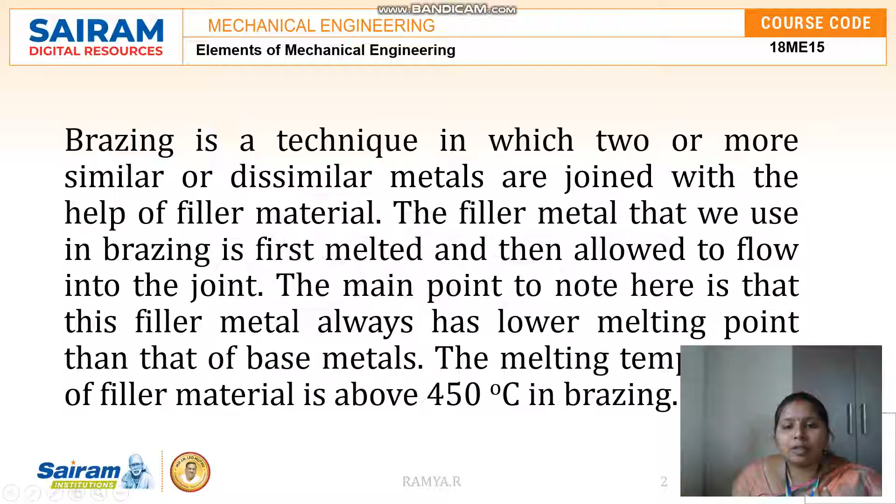The main point to be noted here is that the filler metal always has a lower melting point than the base metal. The melting temperature of the filler metal is above 450 degrees Celsius in brazing. In soldering, the melting temperature is less than 450, but here it is more than 450 degrees Celsius.

So why do we need brazing? Why should we choose it? We choose brazing based on some of its key features. It is the most cost efficient process. Component distortion is almost eliminated, or we can say reduced. It is the most compatible method for joining dissimilar metals with a strong joint.

No need of much skilled labor. Thin and thick surfaces, for example plates, can be easily joined. More complicated joints that cannot be joined with the welding process can be easily joined with brazing.

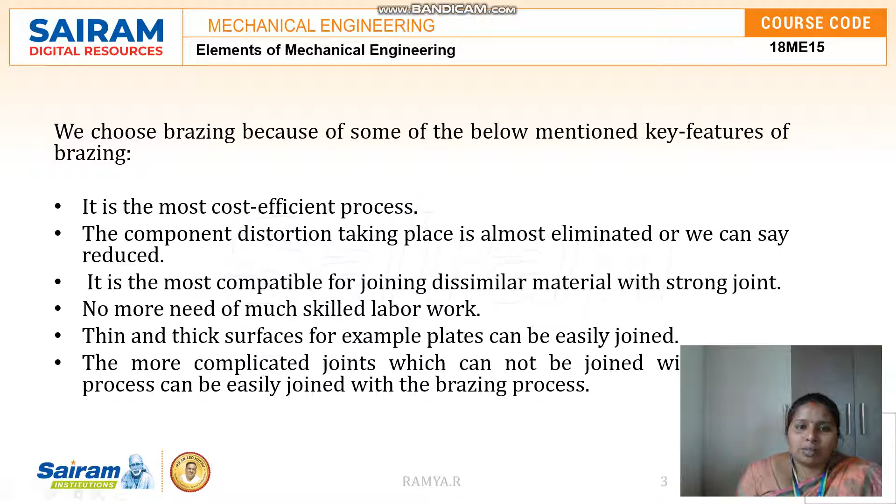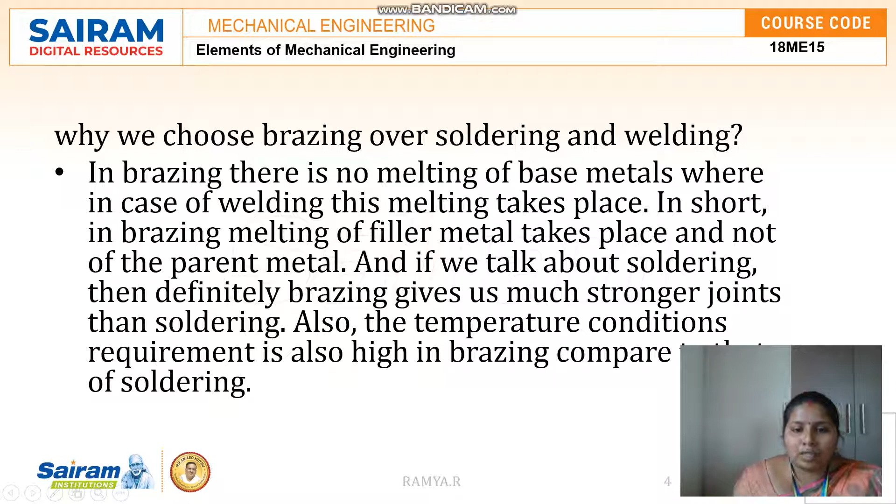Why should we choose brazing over soldering and welding? In brazing there is no melting of base metal, whereas in welding this melting takes place. In short, in brazing melting of the filler material takes place and not of the parent metal. Compared to soldering, brazing gives much stronger joints. Also the temperature requirement is higher in brazing compared to soldering.

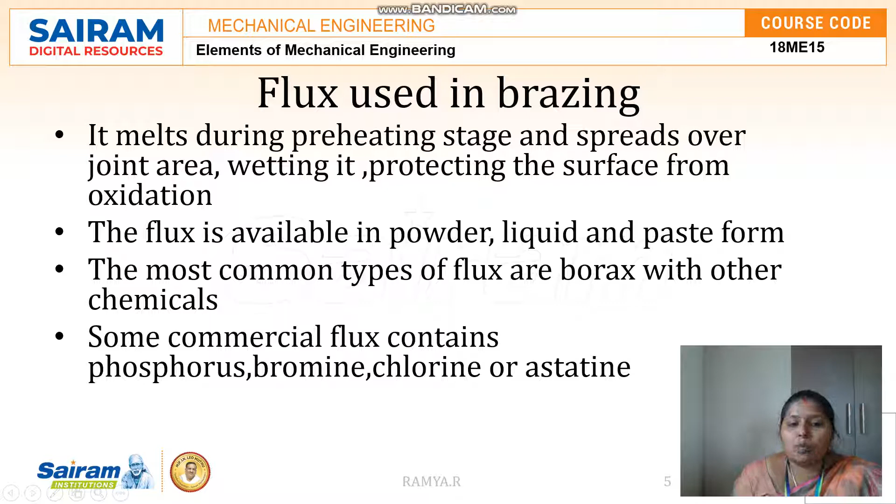The next one is about the flux used in brazing. It melts during the preheating stage and spreads over the joint area, wetting it and protecting the surface from oxidation. Flux is available in powder, liquid and paste form. The most common type of flux used is borax with chemicals. Some commercial fluxes contain phosphorus, bromine, chlorine and astatine. These are some of the fluxes used in brazing.

If there is a process, there should be precautions for it. As brazing is one of the efficient metal joining processes, you must take the following precautions in order to complete brazing smoothly. Use flux in the proper amount to prevent oxidation.

Do not overheat, and provide proper temperature with an appropriate atmosphere. Wear proper gloves and goggles, and avoid direct contact with the workpiece. Keep good ventilation and do brazing in a sufficient place rather than small or unfavorable places.

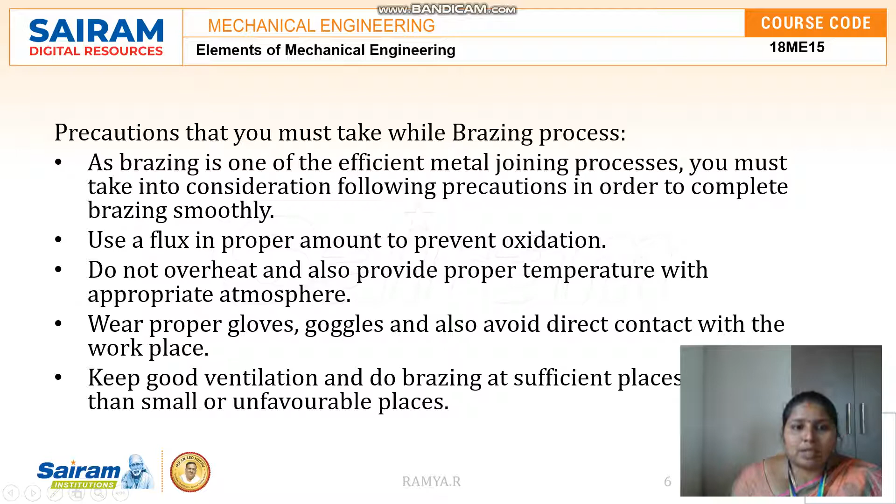Next are the advantages over other metal joining techniques such as welding. Brazing is used to bond a variety of metals, dissimilar metals and even non-metals, that is metallized ceramics. Component tolerances are maintained more accurately than welding. Brazing does not melt the base metal, so it allows much stricter control on tolerances. It produces a clean, corrosion resistant joint.

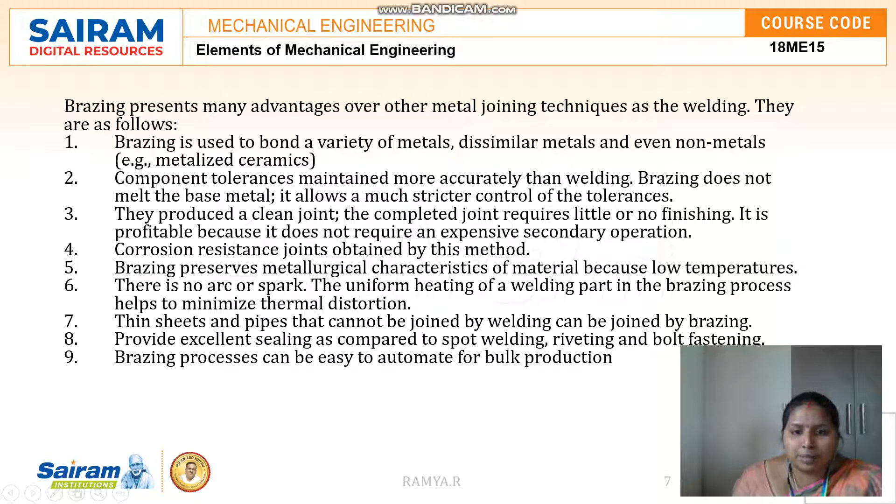Brazing preserves the metallurgical characteristics of the material because of the low temperature. There is no arc or spark produced, and thin sheets can be easily joined by brazing, which cannot be done by welding. It provides excellent sealing compared to spot welding, riveting and bolt fastening. The brazing process can be easily automated for bulk production. These are the advantages over other techniques like welding.

There are different types of brazing available according to the situation. The first one is torch brazing. This is the most common type of brazing technique and one of the most commonly used brazing processes.

Basically, it is done in air or open environment. The torches used are oxy-fuel gas torches. Torch brazing is further classified as manual, automated, and machine torch brazing. Propane or acetylene are the two fuels that are used in torch brazing.

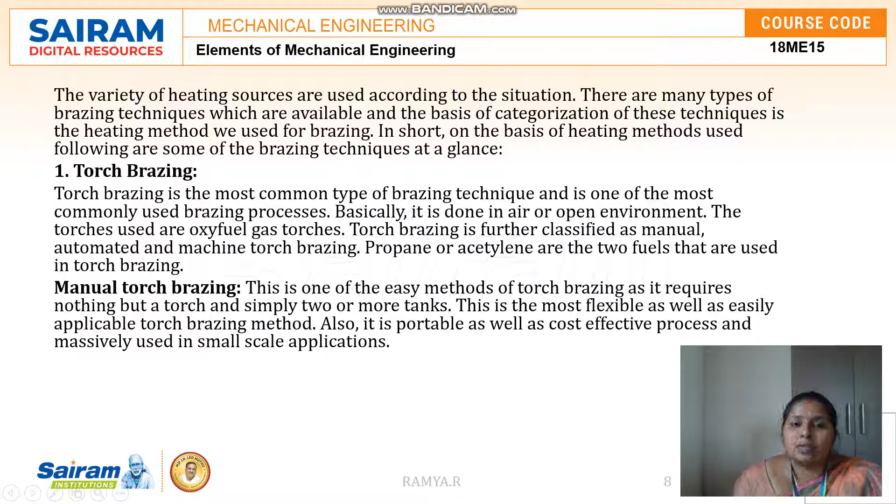The next one is manual torch brazing. This is one of the easiest methods of torch brazing, as it requires nothing but a torch and simply two or more tanks. This is the most flexible as well as easily applicable torch brazing method. Also, it is a portable as well as cost effective process and massively used in small scale industries. So this is torch brazing. So this is how the torch brazing is done.

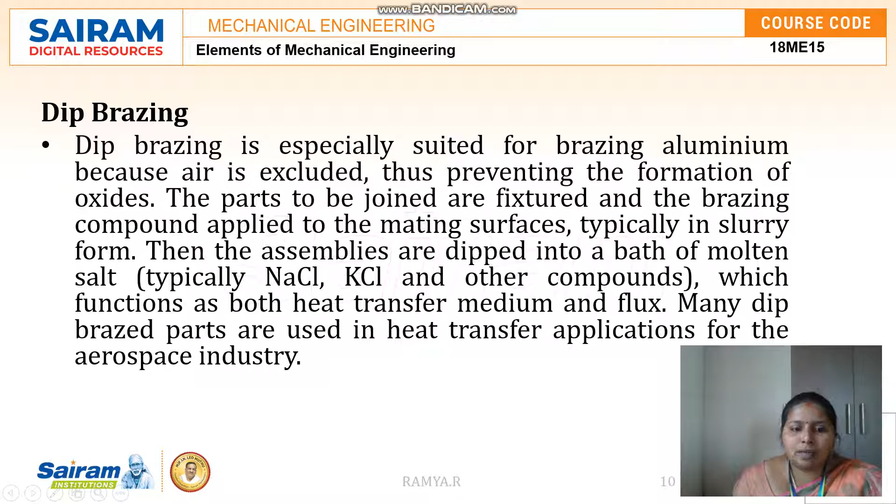And the next one is dip brazing. This is suitable especially for brazing aluminium because air is excluded, thus it prevents the formation of oxides. The parts to be joined are fixtured and brazing compound is applied to the mating surfaces, typically in a slurry form. The assemblies are dipped into a bath of molten salt, which functions as both heat transfer medium and a flux. Many dip brazed parts are used in heat transfer applications for the aerospace industry.

So this is how the dip brazing is done. You can see the slurry in which the component is dipped and it is taken out. So this is commonly used for producing parts for aerospace industries.

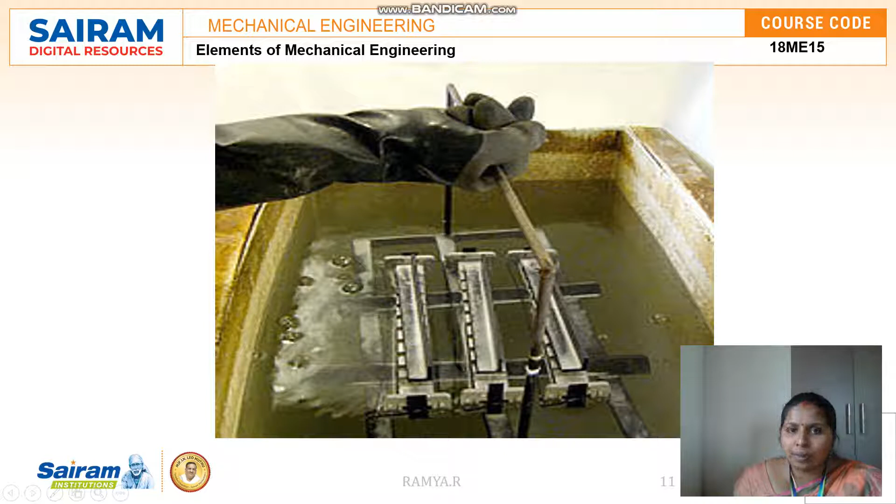And the next one is induction brazing. In induction brazing, the metal parts to be joined are placed inside an induction coil and a very high frequency electrical current is passed through. As current gets induced on the surface of these metal parts, the resistance of the metal part opposes the inducing current. As a result, heat is developed and consequently the metal parts get heated.

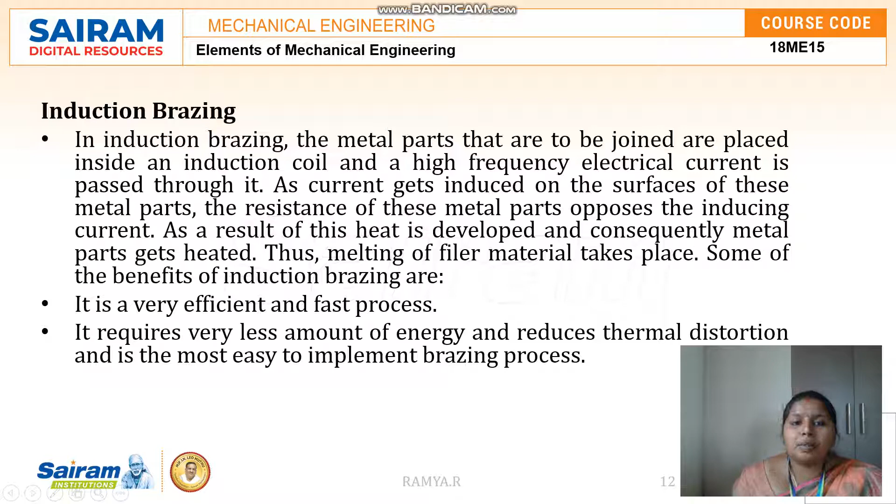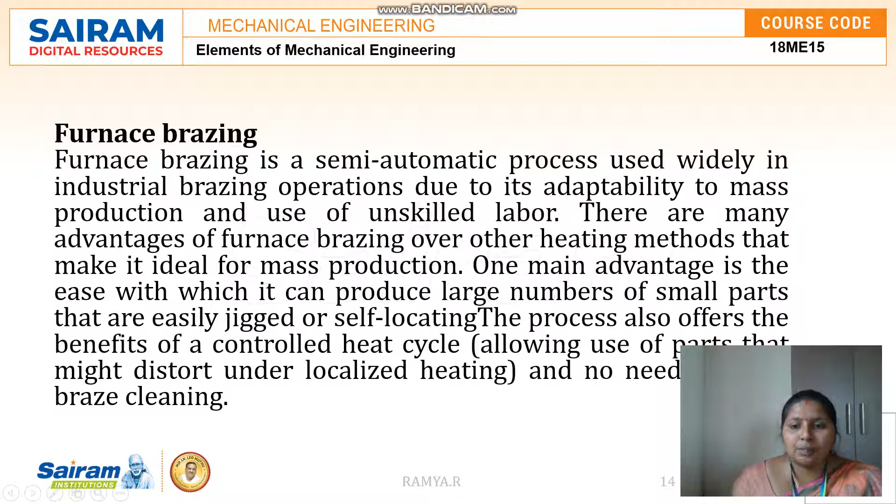So the next one is furnace brazing. It is a semi-automatic process which is commonly used in the industries due to its adaptability to mass production, and also it requires unskilled labor. There are many advantages of furnace brazing over other heating methods that make it ideal for mass production. So this is how the furnace brazing is done.

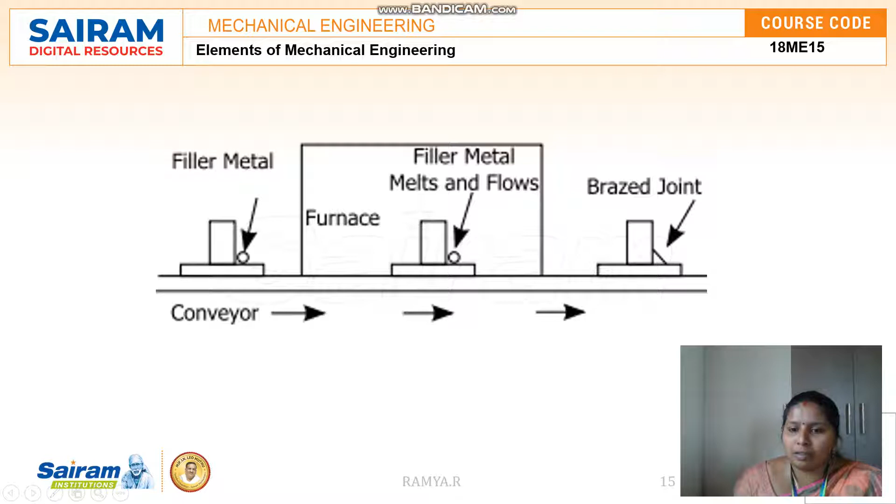Filler metal is sent inside the furnace, and it gets joined. So here you can see a filler metal is placed on the component to be brazed, and it is sent inside the furnace. In the furnace it gets heated up, and it joins the ends. So this is how the furnace brazing is done.

Here is a small comparison between soldering, welding, and brazing. Welding creates strong joints, whereas soldering gives very weak joints, and brazing is weaker than welding, but it is stronger than soldering. The temperature required for welding is around 3800 degrees Celsius. Up to 450 degrees Celsius is enough for soldering, and for brazing more than 450 degrees Celsius of temperature is required.

The cost involved and skill required are high for welding. For soldering, cost involved and skill requirements are very low. For brazing, cost involvement and skill required are between the other two. Heat treatment is generally required to eliminate the undesirable effects of welding. No heat treatment is required in soldering, and for brazing also. No preheating of workpiece is required before welding is carried out, and preheating of the soldering and brazing is required.

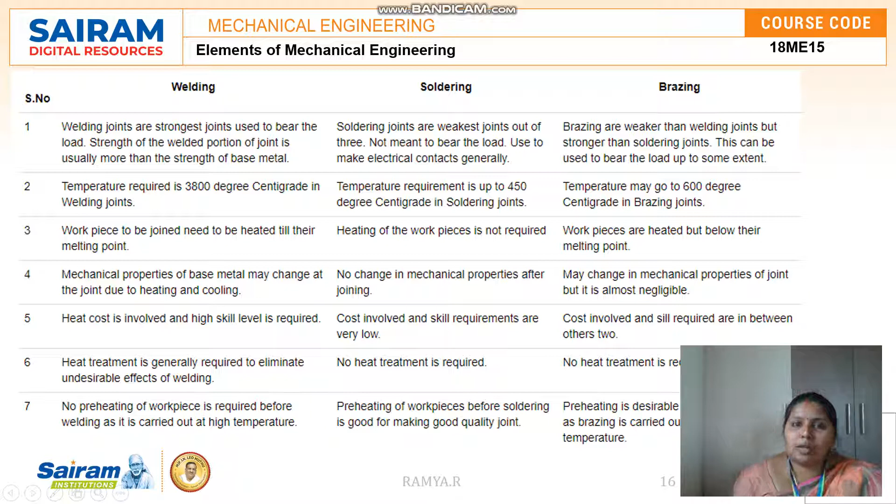So these are the comparisons between soldering, welding, and brazing. So this is about what brazing is, what the types of brazing are, and the comparison between soldering, welding, and brazing. Thank you.